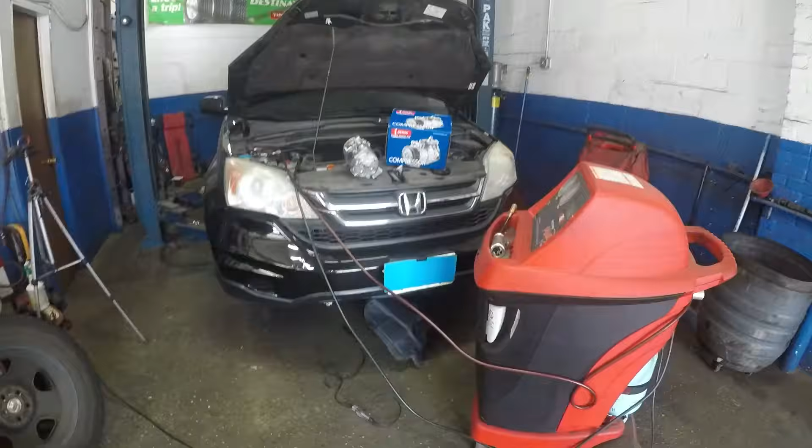Today I got this AC machine hooked up to this 2009 Honda CRV, and what I'm doing here is sucking all the Freon back into the machine. Pretty much it's called recovering.

Whatever Freon is in the system is being taken out, because this Honda CRV has a bad AC compressor.

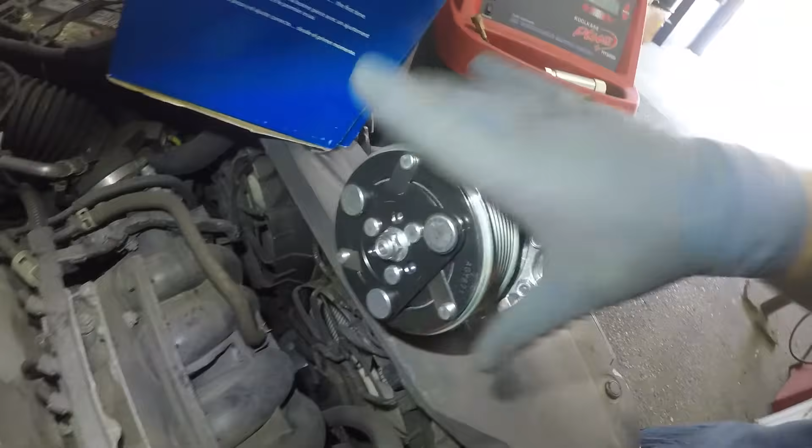This is what the piece looks like. This is called the magnetic clutch here. So when it gets power, this engages, so both of these spin the belt and this spins together.

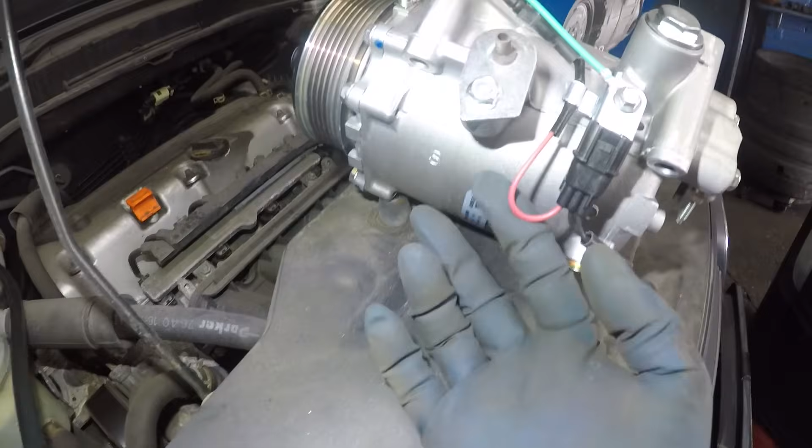So see this red cable down there? You could check the power with a test light. I do have a video right down here.

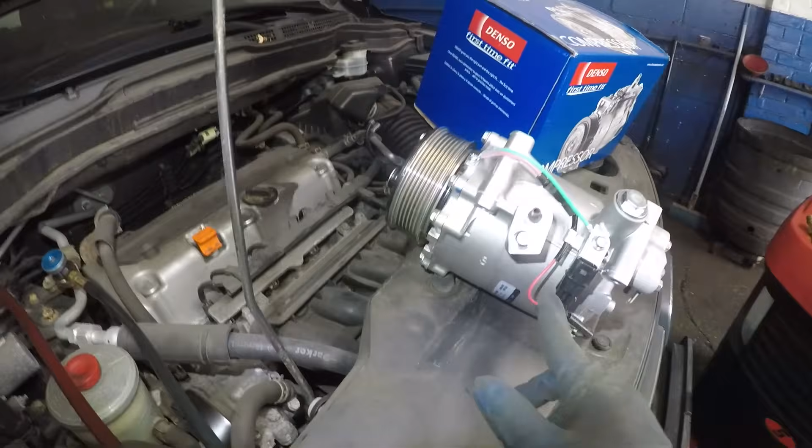That's where the AC compressor is. If this has power and your AC compressor doesn't engage, it's a bad unit, it's a bad clutch inside. Try not to replace just the clutch, because it's going to be probably more expensive that way. This thing is about 300, almost 400.

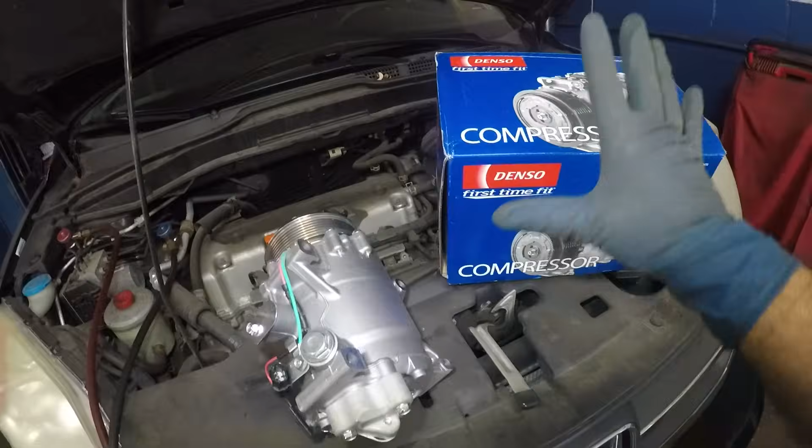That's it, $400 even. This is what I'm using, Denso, and there's a part number. All right, let's throw the box away now. It doesn't have a core, it's a brand new piece.

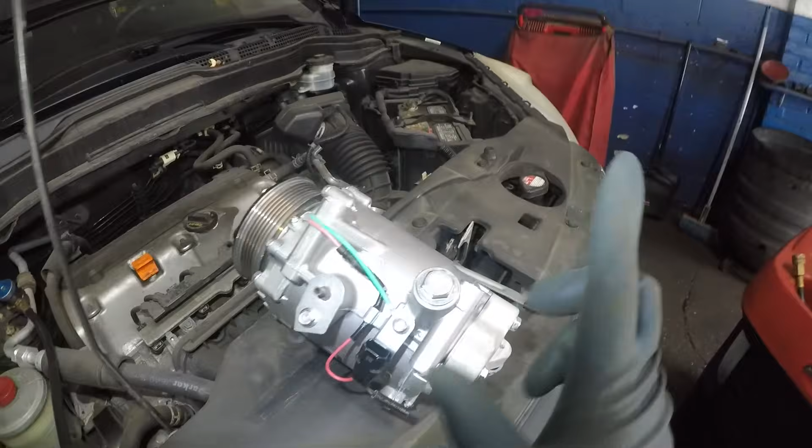So there's a line that connects up here, and there's a line that connects over here. They're both 10 millimeters, I'm gonna remove them both. This thing has oil inside, we don't need to add any oil, just make sure with your parts department. But I'd like to recover even the oil later on and put in fresh oil.

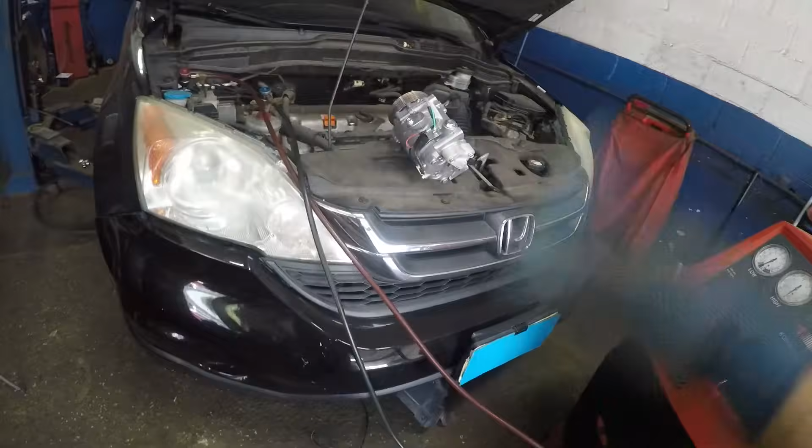Anyways, we're gonna get this job going by removing the belt, and we're gonna push this reservoir out of the way. We'll get the belt off first, and from the bottom we're gonna take out the 2 bolts for the line, 10 here, 10 there, and replace the new compressor. We're gonna let this thing recover, and then once it's done, we'll vacuum and add the correct amount of Freon into the system.

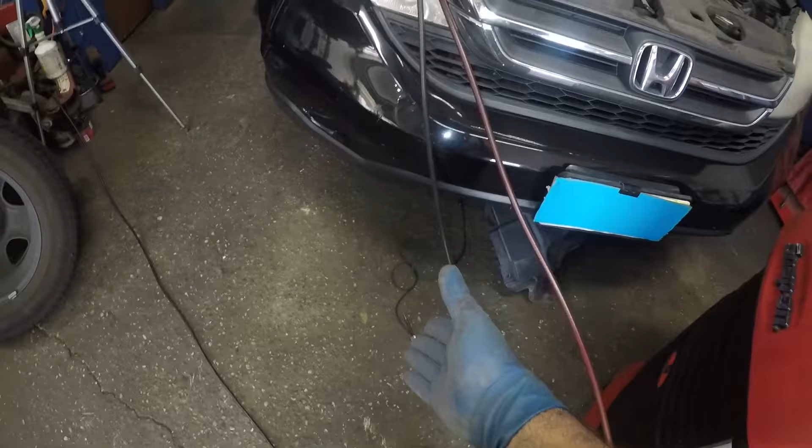Anyways, stay tuned, check out the video on how to check the relay fuse on this bad boy. Use a test light before you make any determinations. Change the relay anyway, I did that on this car. It's gonna get it, it's gonna stay there. You never know when that relay is gonna fail, so check that out.

All right, so far I popped this clip right there because it was holding onto the pipe on this reservoir. I'll push this tab and the reservoir bottle comes up, push it to the side, and I can see the tensioner. All right, so let's take out number 10.

What I'm gonna do is take off the 2 bolts right there, 1, 2, so this bracket's out of the way, so I don't want to see that bracket.

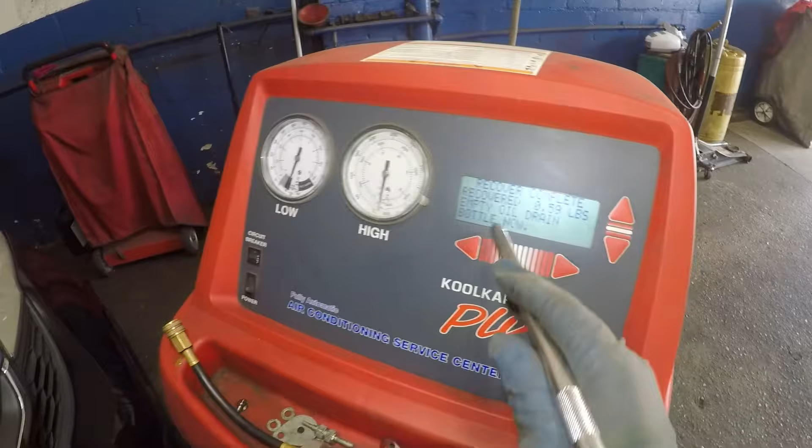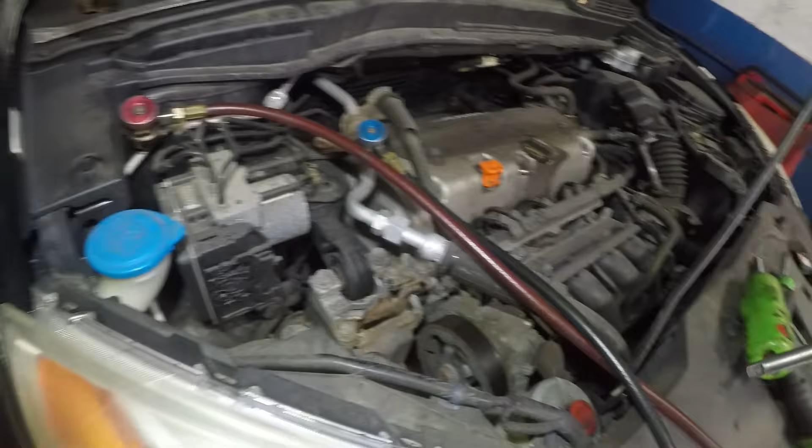So the machine has recovered Freon and oil. It didn't have a lot of Freon, but the system still kicked in, and it has power, so the compressor should have been on. Even if it didn't blow cold, it should have been on.

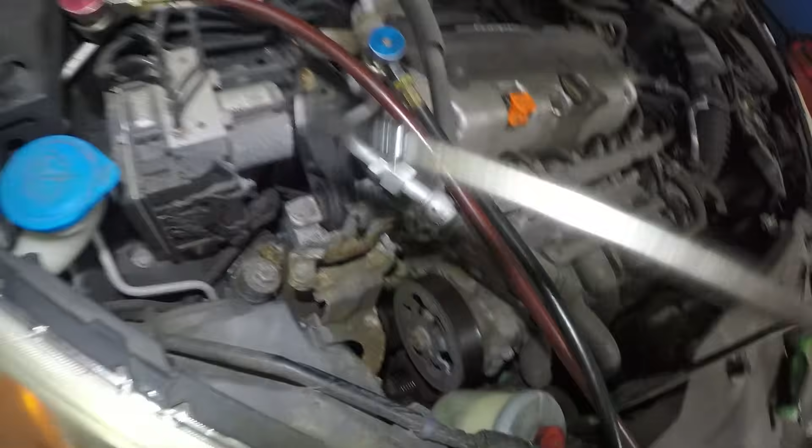But anyways, let's take this, let's put this on, take out a little electric drill. I'm gonna put this back last, that'll be the last thing I put on this little guy.

All right, now we have a lot of access, and we can even push this bottle more down if you like, but I don't want this to block my belt, so we'll probably bring it to this side. So we need to get a 14 and pull on that belt. A lot of people can reach it from the bottom, it's all up to you.

At one time I had to remove this mount because I could not get it, but anyways, I'm gonna do without it today. So this is the part that you're only gonna see a little bit, because I do need to put my camera away.

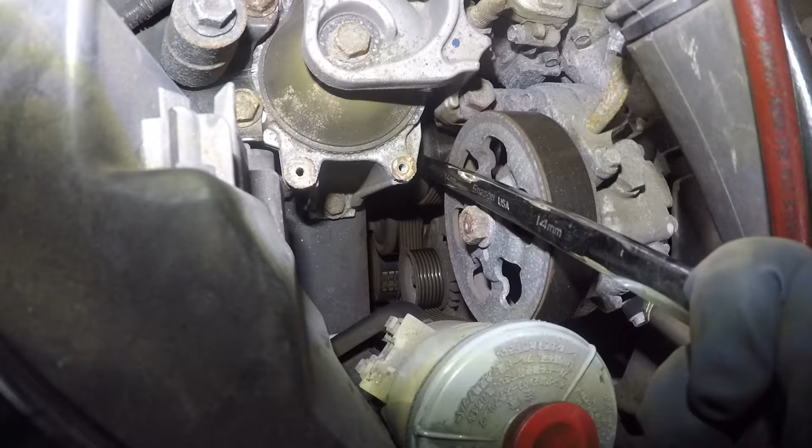So I got this, let me just show you what I'm doing over here. Get out of here, reservoir. So all I'm doing is yanking this little guy, and you see the tensioner, it just goes out of the way and the belt is loose, but I need my other hand to slip the belt off. So just do that, and if you like, push the reservoir to this side.

Okay, so I got the belt off, and now I can go down below. I'll leave it like that. My ratchet here is stuck, it's all right. The reservoir can sit here. Do not start the engine with this thing here, you'll rip apart, you'll rip a hole in that thing.

But anyways, we're gonna go down. So the belt is off, machine's out of the way. We're gonna go up.

So the vehicle is up in the air. What we're gonna do next is, if we come down here, you could take off the belt if you like right now, or just let it hang there and bypass the compressor.

Right from down here, we're gonna take off the 12 there, and then there's another 10 here, and another 10 connected to that line. At the same time, we can disconnect the connector by pushing on the tab here. Take off the connector, let it sit to the side, and make sure nothing else is connected to the line.

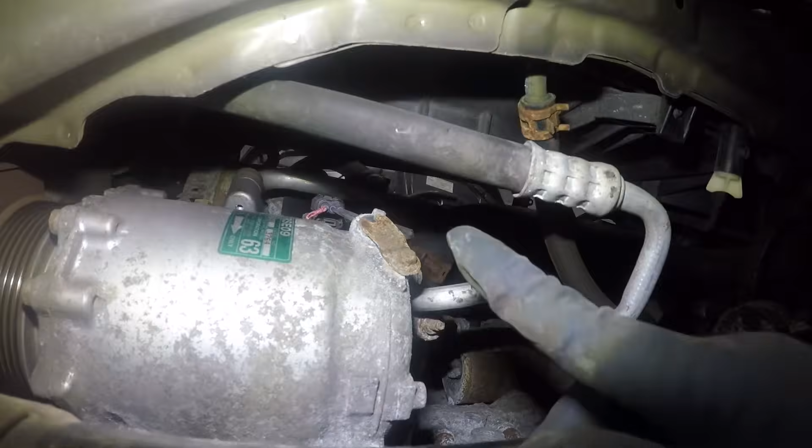So this is pretty much very easy. What I'm gonna do is take off this screw and take off the other one off the line right there. I can reach it from right here with the ratchet. Let me get my tools, and then we're gonna remove 1, 2, 3, and then 4 bolts up here.

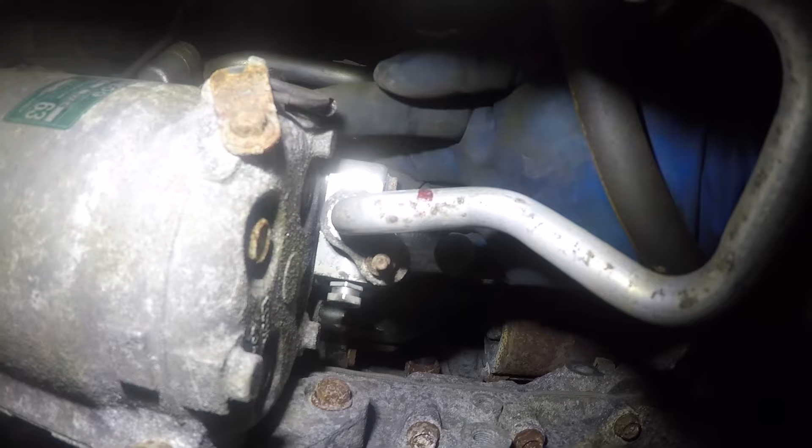They're all 12 millimeters, all of them. This is a 12 up here, you can't see, but let me give you a better view. Right there's a 12 - the lighting's just crappy to get over there. You got a 12 right there, sitting on top of it, right in the center. And then you got a 12 here and a 12 right there.

And the compressor should just fall right here. Just be careful with your face. Okay, so here goes nothing.

Sometimes these lines, the bolts on the lines will break, but as they come out, very good. And there it goes, the number 10 right there. And this line should easily - vacuum pressure is cool, it's all good.

So we just took off the vacuum line, and then I'm gonna do the same thing for the one up there. Okay, here goes the second one, right from over here.

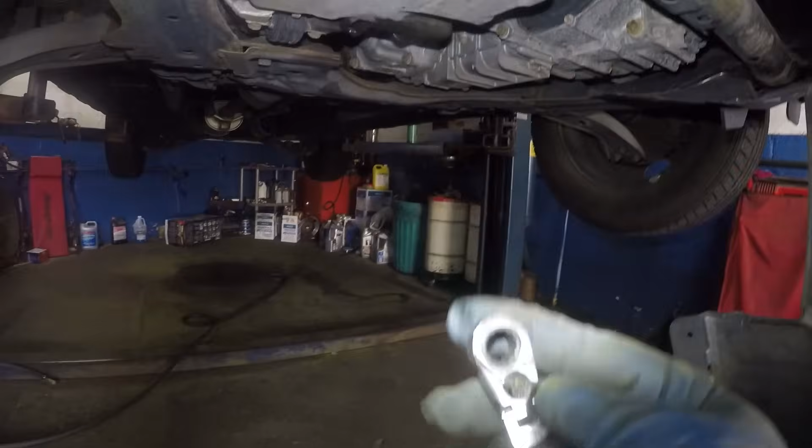Okay, the little guy doesn't want to fit on it. I might have to get a deeper socket or a wrench. Okay, so here goes try number 2 with the ratchet gear wrench. That's what I meant. Okay, got that going the wrong way, and that's not gonna fit there either. I'm sure that's not gonna fit there.

All right, I am gonna have to work some magic here. We'll be right back, and I'll show you the tool that I use. I cannot get that number 10 on the line, so my plan is to bring the compressor down a little bit because everything is just blocking my wrench or ratchet from turning.

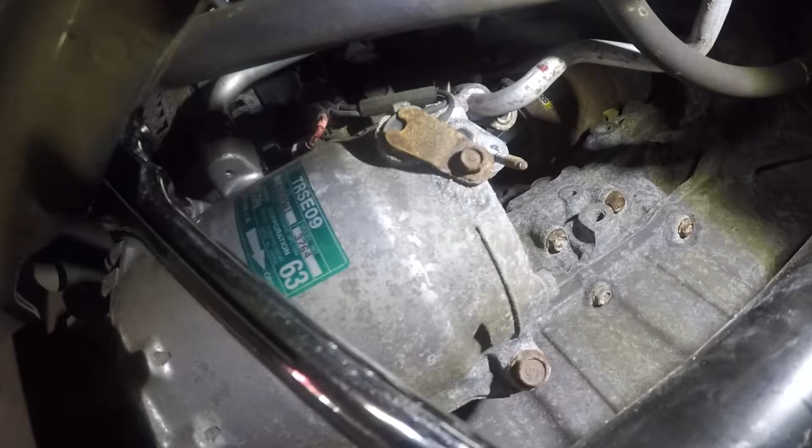So I'm gonna take off the 12 here and the 12 there on this compressor next. So I'll take the 2 number 12s, and then you'll see me take off the bottom 2. Okay, so I got this 12 deep socket hooked up. I'm loosening the one on this end, and this is the second one I'm loosening right now.

Once it's loose, you might be able to remove them by hand, just like so. And if they come out, very good. Try not to take off the bottom 2 because that's gonna hold it down for you. They're very easy, but these are long bolts, and this one comes off. Let me see - okay, this one's still tight, so I'm gonna have to keep it going with the ratchet and the socket here. Just keep it going.

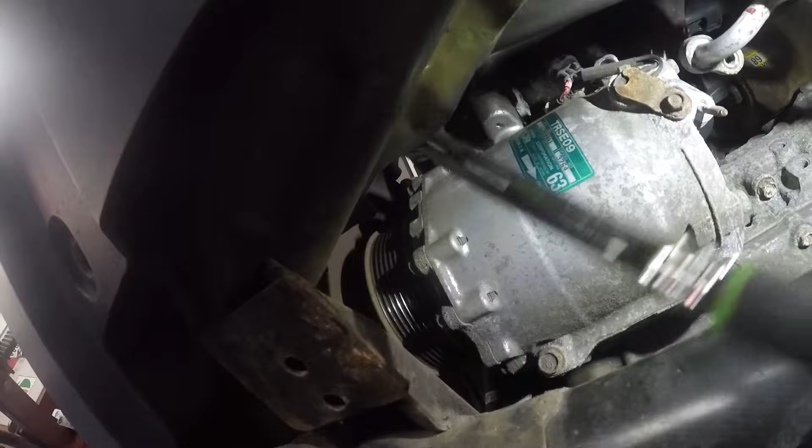Please be loose. Okay, so let me get that off. Once that is off, we'll do the bottom 2. Okay, got both of the bolts out from the top.

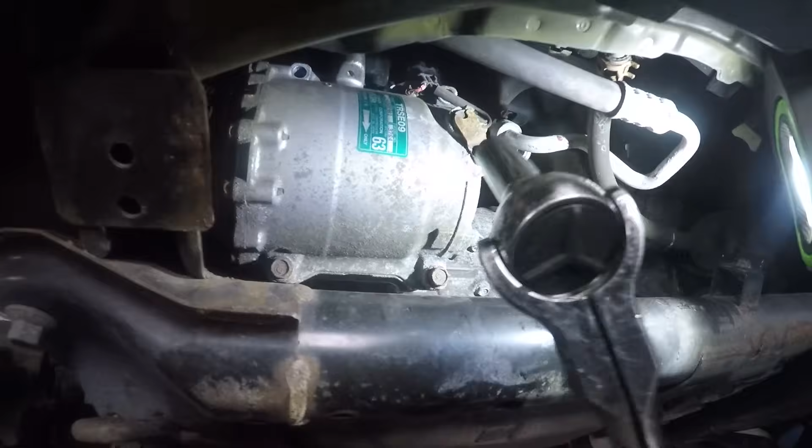Let me smack this one. I might have to get a smaller socket extension. Okay, got like an inch long extension there. Okay, so this is loose. I'm gonna drill the rest of it out.

So let me break this one loose also, and then we'll use our electric drill for the rest. Here goes nothing, boys and girls. So there you go. I like to keep them in order.

You see, this is shorter, so I'll keep these 2 on the top, this one right exactly where they're at, and the compressor is all loose. So these 2 are the same size, and those 2 are the same size, and the compressor is probably hooked on and hanging there. So what we do is we just take off, and now we'll have better access.

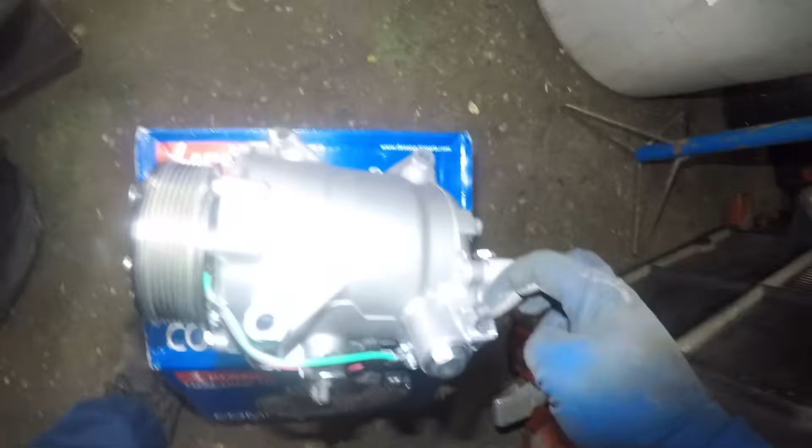So pretty much this compressor is sitting here. You see these little notches here? It's sitting on those notches. And this is the notch I'm talking about right here. And it's just sitting there.

Lift it up and bring it down. Lift it up and pull it off. Let me get that second line loose, and then the AC compressor should just come down right through here.

Doing this worked out really good for me. Look at this, I got the bolt loose already. This thing is a piece of cake. Pop the line off and the AC compressor comes right off. So there we have it, our AC compressor is nice and loose.

What we're gonna have to do is work some magic here now and get this guy out of here. I might not be able to catch it on camera, but this is where it's gonna come down from, right here. Just be careful with the transmission line that goes to the radiator, and once it's out I'll show you guys exactly what I did here.

Pretty much I pushed the line up and twisted the compressor. It still has oil in it. Whoa, whoa, whoa, I thought the machine would suck that out. Oh my God.

Snap on. I'm not even gonna say nothing. I'm just gonna leave it there.

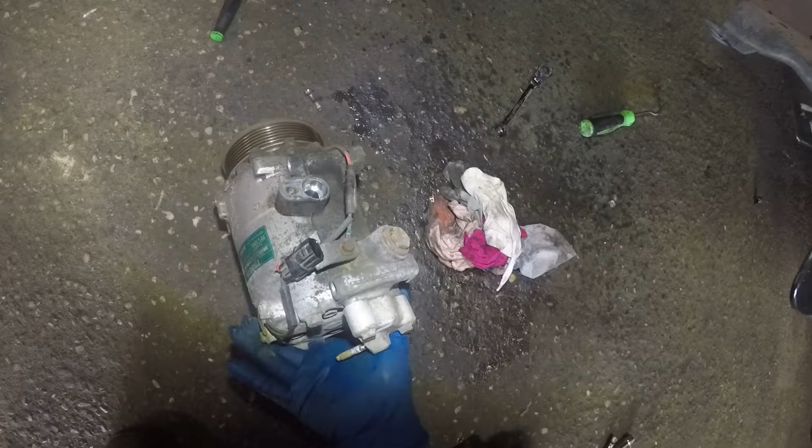There's your AC compressor, it's a done deal. All right, so I'm gonna put this away.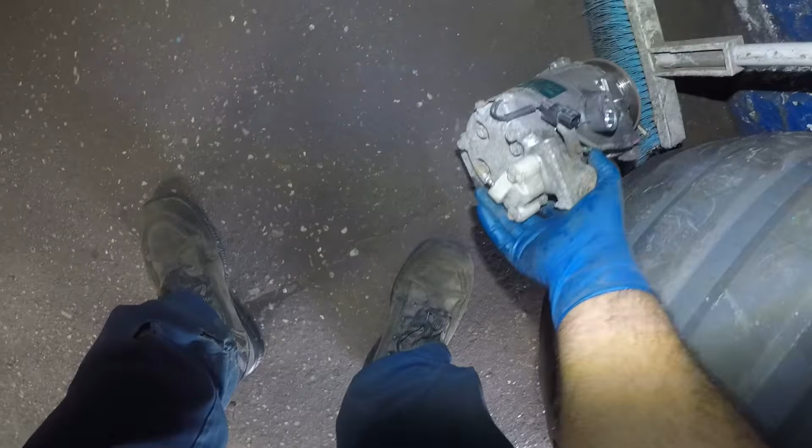Just put this guy right here, leave it right there, make sure it doesn't leak. Make sure you buff this area. The compressor needs a good ground. This looks good, no problem. Just make sure you buff the areas down.

I'm gonna take a small break. I'm gonna come back and throw in the AC compressor.

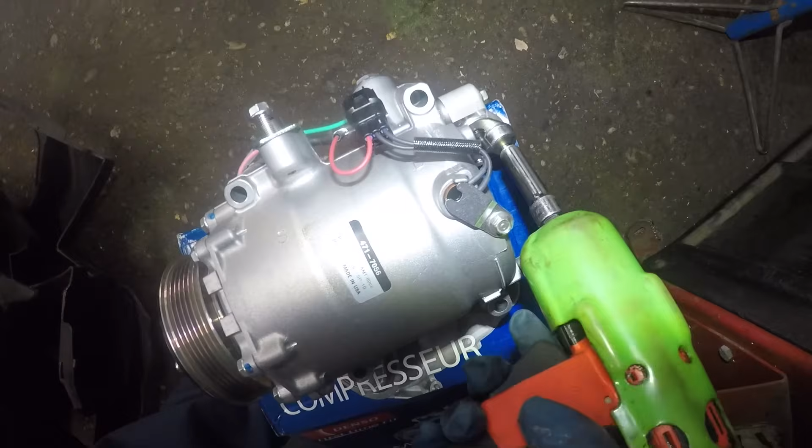Okay, so here's our AC compressor. Let's take off this bolt and this nut here. It comes off. This one, I'm sure it has oil in it. Let's pop this guy open.

What I like to do is, if you want, you can leave this rubber boot in there so you don't make a mess. Remember how we pulled it off? Let's push this back in because it'll be easy to take off. We could reuse these or the older ones, or use these new ones.

Let's make sure this harness here is connected. I had a problem one time, this wasn't connected and nothing worked. Okay, let's grab this guy. It's heavy.

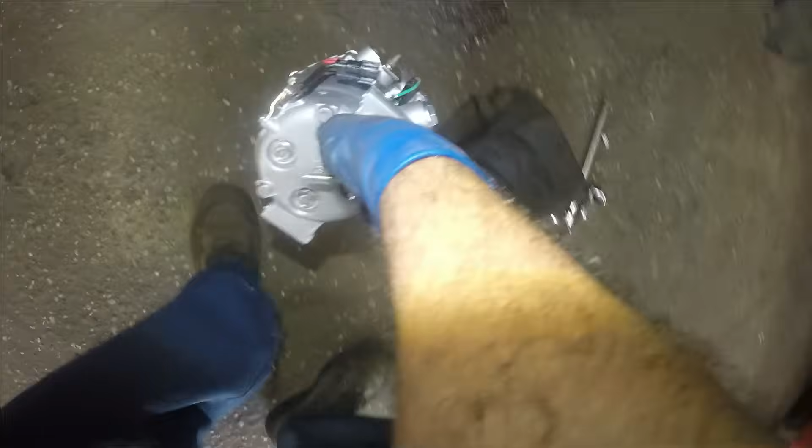Slowly. What I'm gonna do is stick this back in there, and then we'll continue from there. I don't want to drop it while I have the camera in my hand. So our AC compressor did not come with new O-rings, but those look pretty good.

Should be all right. We'll put a little bit of dye, and what we're gonna do is first put this line in. I don't want to pull that off yet. Let me center this so it's facing upward.

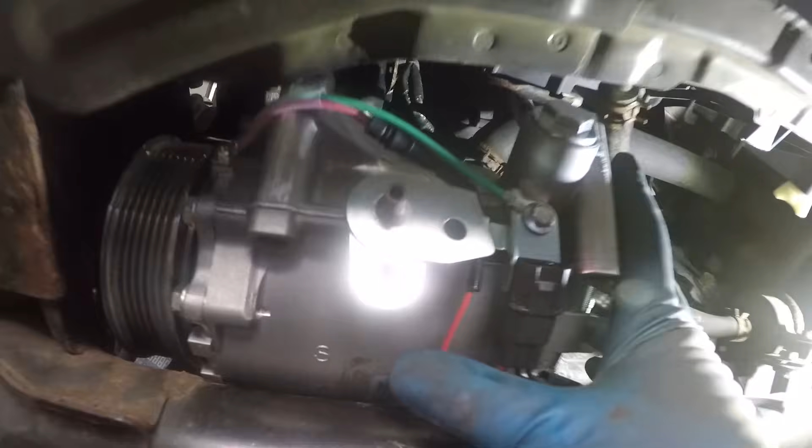Just twist it. I am going to be taking this old bolt because the new one is not lengthy enough, and make sure your line sits flush. After that, you're going to tighten this bolt and everything should be good. Once I have this in, we'll continue.

Let me get this going and then we shall continue. Once this line is nice and tight, while you're here, this connector, just go up above it. We don't want to damage the connector, or maybe the connector stays behind this way. Plug in the connector, but not yet because it's not lengthy enough, you'll break it.

So let's lift this guy up. We're gonna let it sit right where it belongs. Right there, you see that? It's gonna sit itself right where it belongs.

And then what we're gonna do is let's take the shorter bolts. Okay, it's not perfectly straight, I think I got it crooked. There you go, that's much better.

Let's take one of the bolts, put it in there, catch the threads. The key here is catch all the threads, wiggle the compressor around if you need to. Once you have everything lined up and all the bolts have caught threads, then you can tighten it.

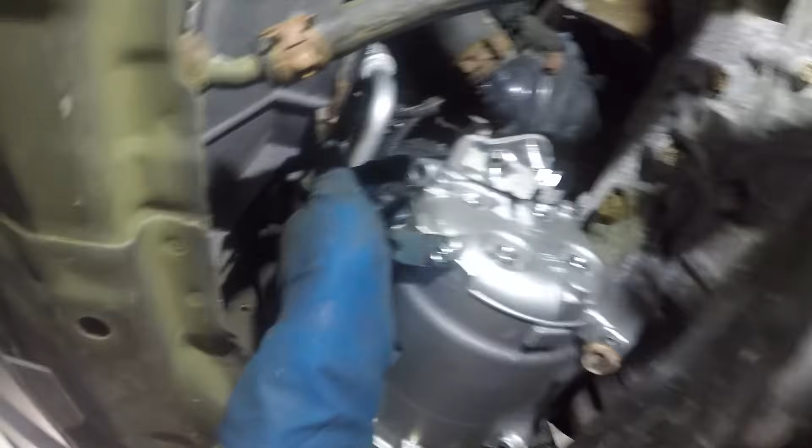But what we're gonna do now is let's connect this connector. Let's take this line and just leave it here for now. We don't want to put this line in because we might have to move it around for the bolts. So let me get all the bolts in.

Pretty much I got these two bolts in. I'm gonna get them in there, but I am not gonna lock them down because we still need to put the top two in. Just snug them enough where the compressor can move around, but at the same time it will hold the compressor up. If you need to, just go back one thread.

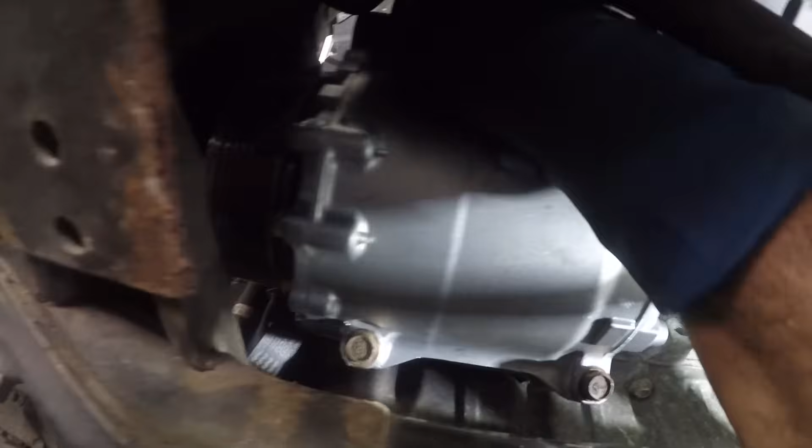And there we have it. Now what I'm gonna do is take these 2 bolts. One goes over here, and the second one goes on the other side. Bada bing, bada boom, I'm gonna tighten all 4 bolts. Make sure you tighten them nice and tight, hand tight, torque if you need to. Make sure your connector's in, and everything looks good.

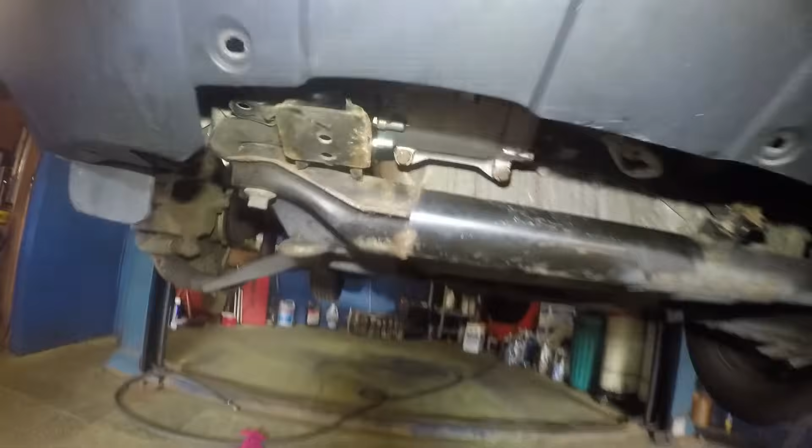Okay, everything is done. These bolts you can torque using a torque wrench. I torqued this one, that one, and the 2 on top, but I did need to work with an extension and this extension here. I'll give you the torque spec, but this vehicle is the same from 2003 and up, same setup, and I'll check a few for you guys. These 2 little bolts for the lines, I did not torque them, just hand tight. This one I ripped with the gun, a little drill gun, light, and spin good.

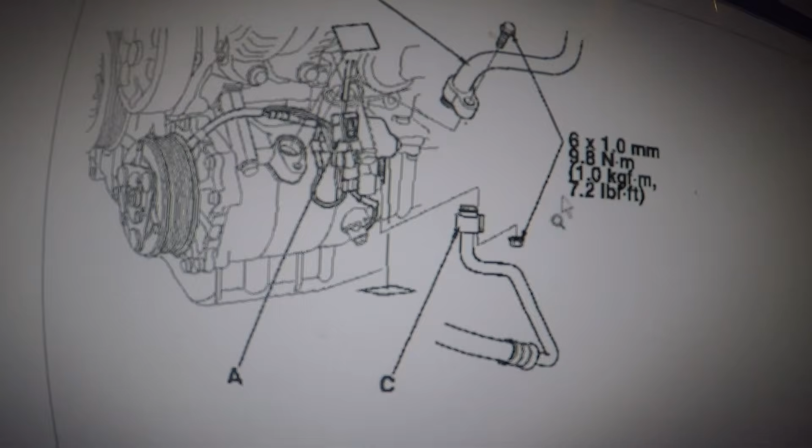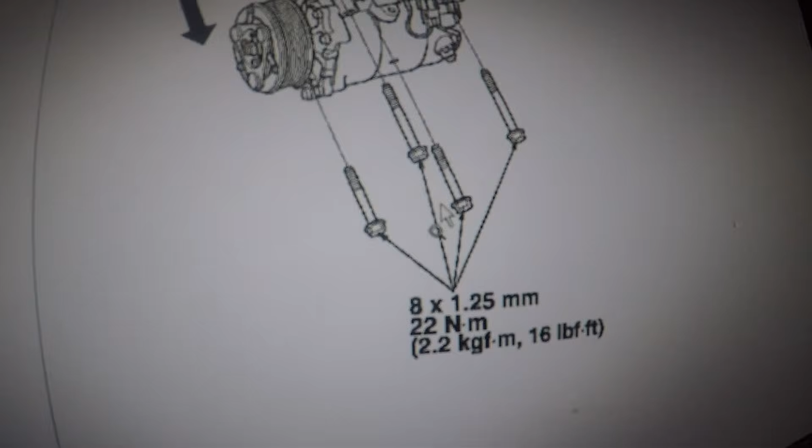Anyways, okay, so we got torque specs for the 2009 CRV. This bolt right here for the AC line, this is the top one, 7.2 foot-pounds. And then you got 4 compressor bolts, they're 16 foot-pounds. Okay, the bolt, the nut, and the bolt, this is for both of them. That's how simple it is. This is for '09, as you can see right there, '09 CRV.

So here's a picture for the '03 CRV, 7.2 for the 2 bolts, just a little bit different setup. And then you got 16 foot-pounds for the 4 bolts. Bada bing, bada boom. So there's pretty much not a difference in torque specs, the job is about the same and everything. But anyways, if you're gonna do it, you might as well knock it out and torque everything properly.

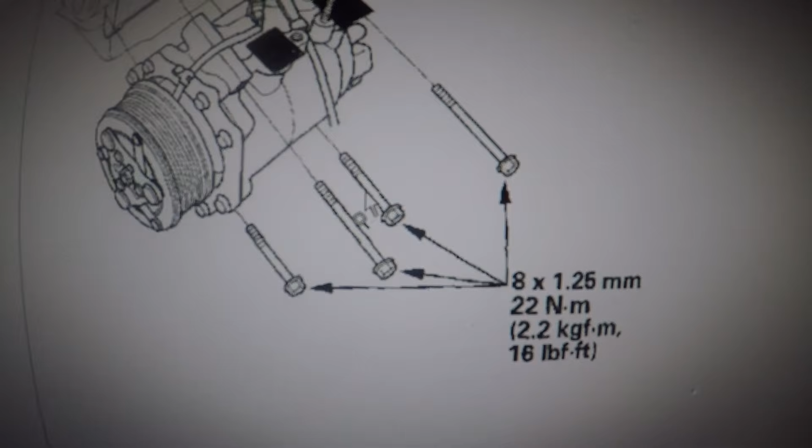Yeah baby, AC compressor is locked in. Only thing we got left is make sure you put a little bit of oil on the ring, or you can put it in here, and then stick this line in, and make sure your seal goes in flush.

And put on the number 10. We're dropping it, getting too excited because it's almost done. The hard part is the belt, boys and girls. Make sure your line sits properly, and then smack it.

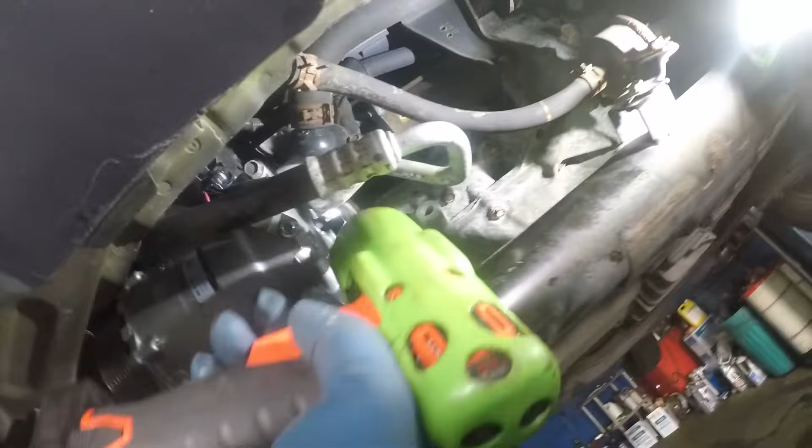Bada bing, bada boom. Pay attention to the leak on these 2 lines. Other than that, you're probably not gonna see me do this part, the belt part, but right from down here you can put on the belt on the AC compressor.

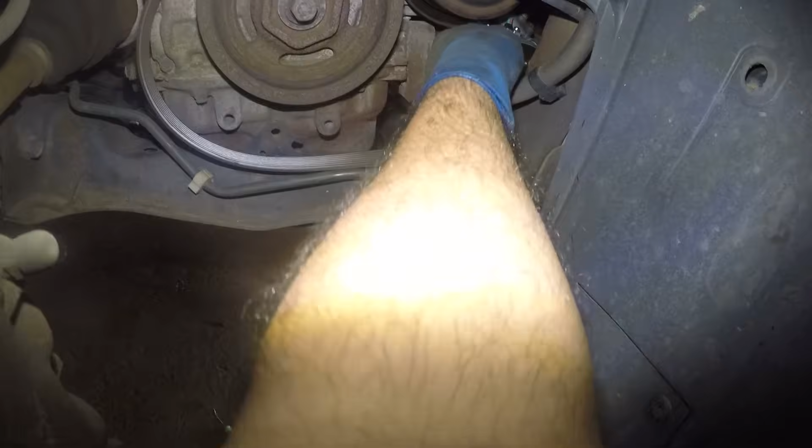It's gonna have to stick right through the gap here. So let me get the belt on, then we'll recharge the whole system. Woo, got the belt on guys, it wasn't as hard as I thought.

So what I'm gonna do is put the rest of the stuff back, this little bracket here, the line, but meanwhile I'm gonna connect my AC machine. We're gonna vacuum for 20 minutes.

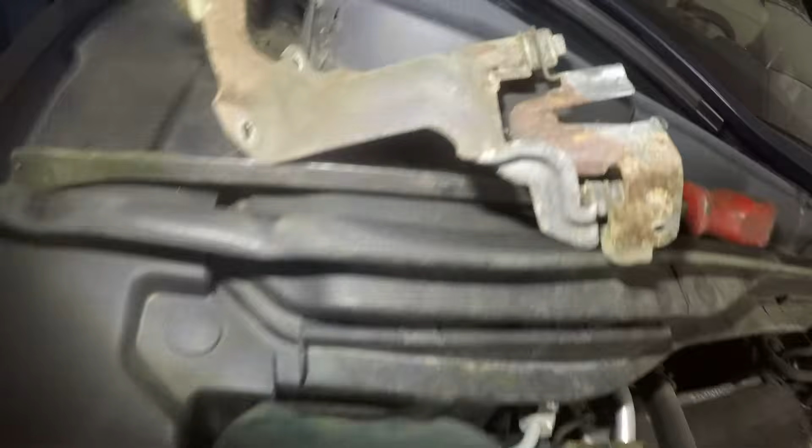So got my machine here now, and what we're gonna do is, this is the low side, we're gonna put this on the low side. Go easy, you don't wanna break the lines. Let's open up that line. The high pressure line is over here on this side, and the caps, I have them up there somewhere. Anyway, this goes on, and I don't know if I got this line in there fully, but I think it's in there.

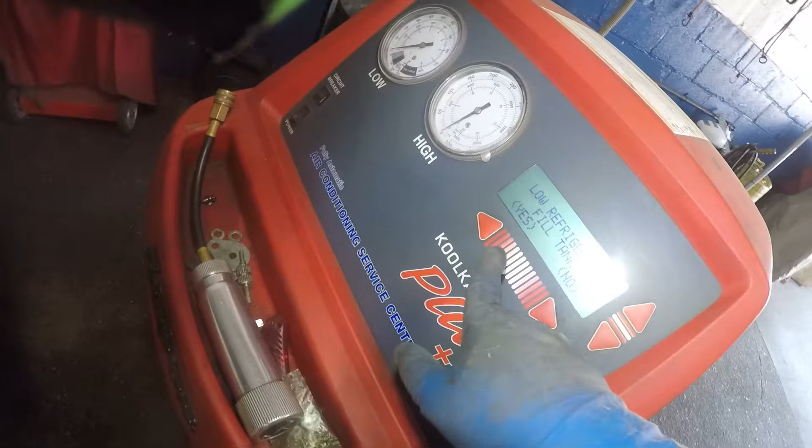Yep, okay, so we're gonna fill the tank. I gotta fill the tank on this guy. Okay, so see the old tank, new tank. Internal tank is low, but that thing was empty as well, so I changed it. Let's fill the tank, start. It's gonna probably put about 9 to 10 pounds of R134 inside the tank.

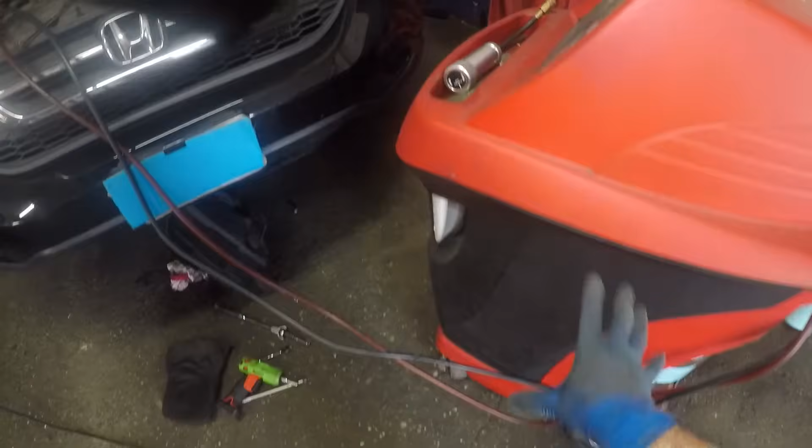Okay, so we're gonna give it a moment, and meanwhile I'll work on this little guy right here. Okay, got them both in there, let's grab our light. Let's smack this bolt in, let's smack the second bolt in.

All right, perfect. This little guy, the power steering line, has to go into that clamp. We're gonna have to bring up this little guy first, get that in, and then lock up the bottom. Okay, got the bottom in, all you're gonna do is lift this up and push this right in. Originally I forced this backward, now I'm gonna force it forward, and you're all done. Make sure nothing is hitting the power steering pulley, the power steering pump pulley, the lines, the pipes here. You're all done, good to go.

Let's pick up all our tools and we wait for the tank to fill up, and then we'll vacuum the system.

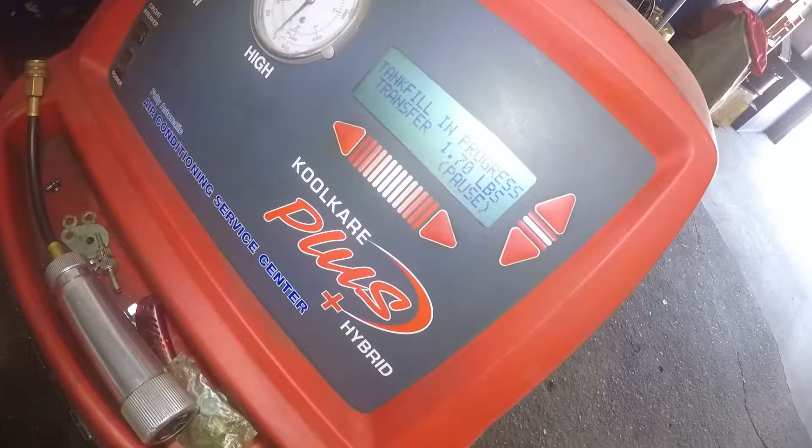So it's working, it's on its way, almost done. And I took in about 5 pounds. It did take in 5 pounds. That's the internal tank, not the car.

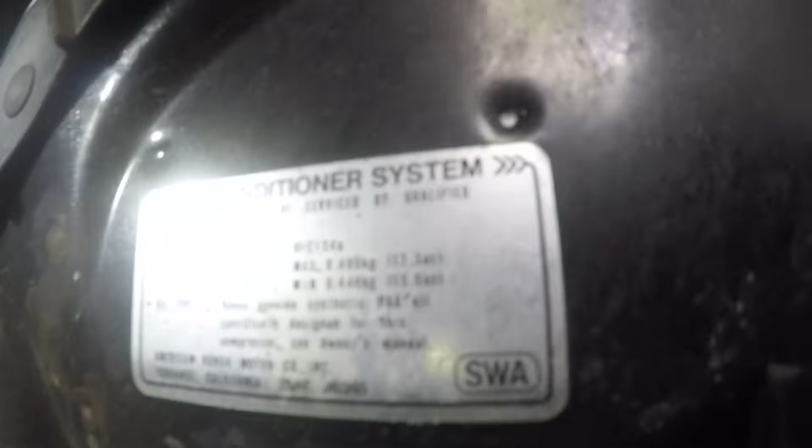Okay, so let's talk a little bit about the car. There's a sticker over here, it will tell you the Freon. It will take 17.3 ounce max, minimum 15.5 ounce, and that oil will be PAG oil, synthetic PAG oil.

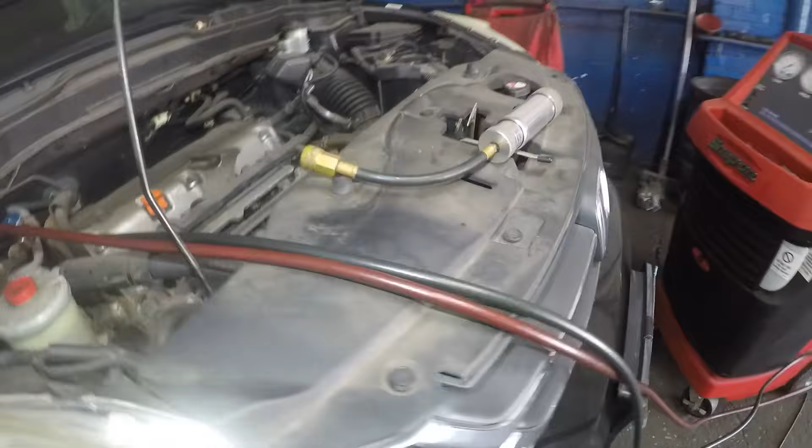Doesn't tell you, but I am using a PAG oil. So I got my oil ready here. Once I do vacuum, I'll throw it into this low line here.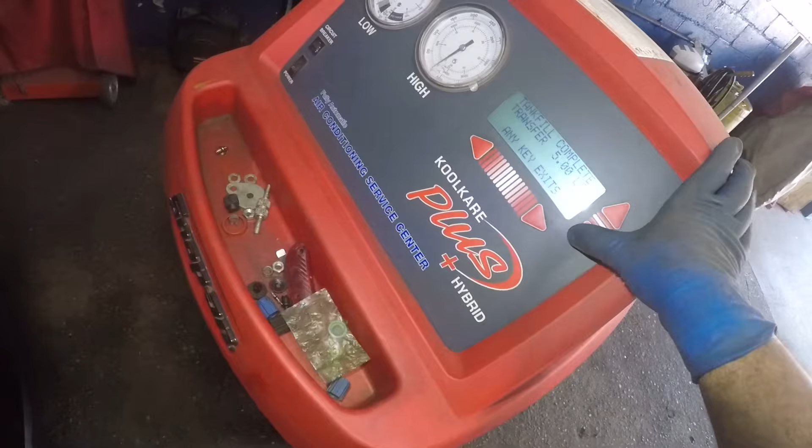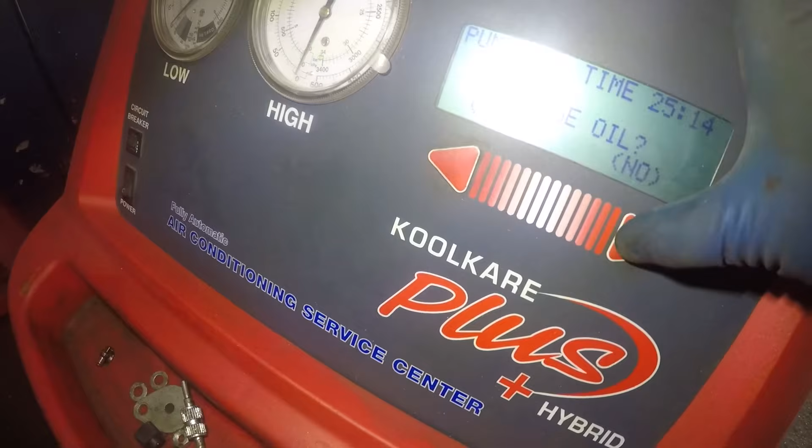Press any key to exit. So what we're gonna do is we already did recover, so we are gonna add oil. Let's just do vacuum, press enter, we still have time. That's the oil the machine is asking about. Let's do 20 minutes, this is a 20-minute wait. Leak test, nope. So 20 minutes of vacuum.

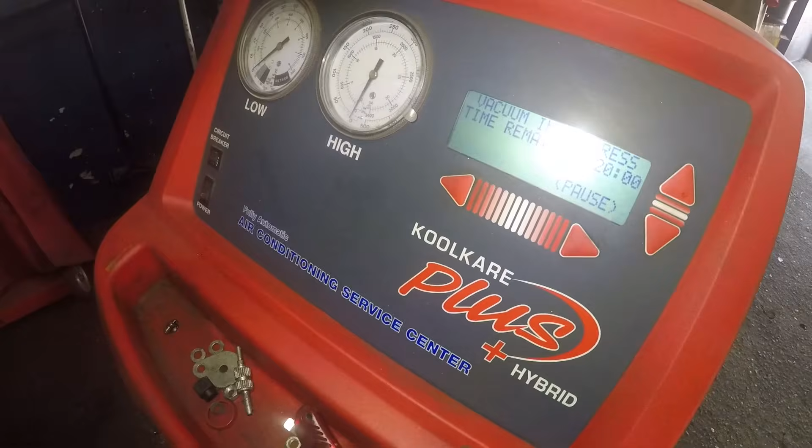So what I'm doing now is I'm sucking all the air, moisture, whatever's in these lines. We don't want anything whatsoever, nothing, nada, zero. And after that, oil goes in and the machine pumps in Freon, and that's it. That's the best way to do it.

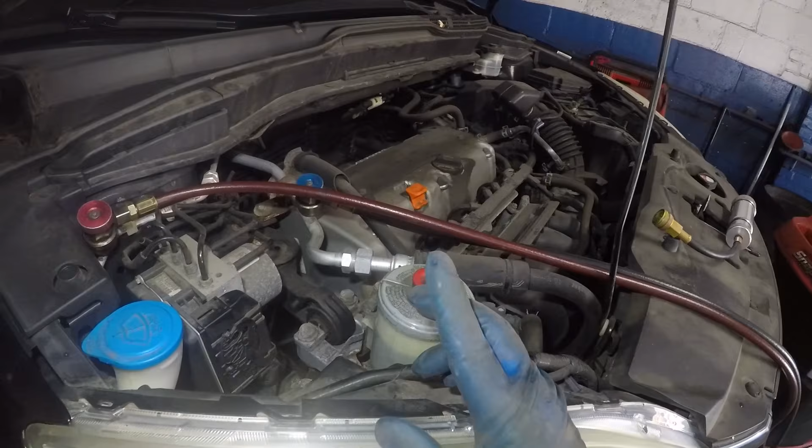Remember I told you the customer did try, if you watch my video about how to, I did do tests on this, the power lead. I did do a test on the compressor, I had power, but the compressor did not engage. Remember, the customer said he did try to put a can in there. It's not gonna work because it has pressure in it. If there's so much pressure in there, more than the can, I would think it will go in -- it would push out instead of going in.

So what we're gonna do next is oil. I wanted a little bit of information about the oil. Too much oil is no good, too little oil is no good. So make sure you measure the oil, know how much you're putting. Even if you don't know how much you're putting, just put it just enough, so you're not killing the system.

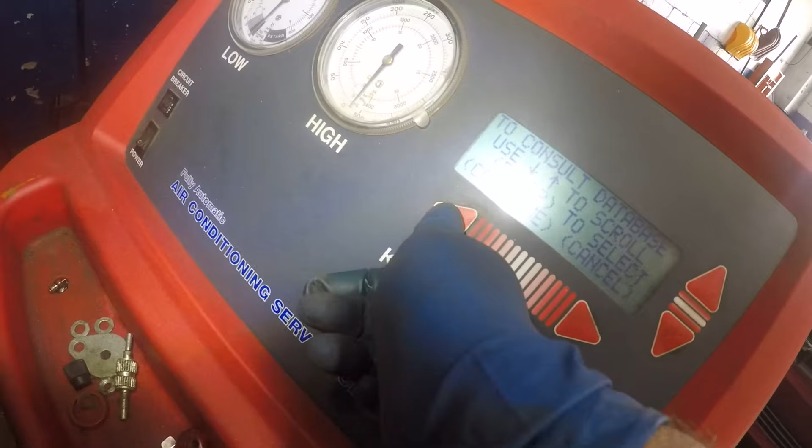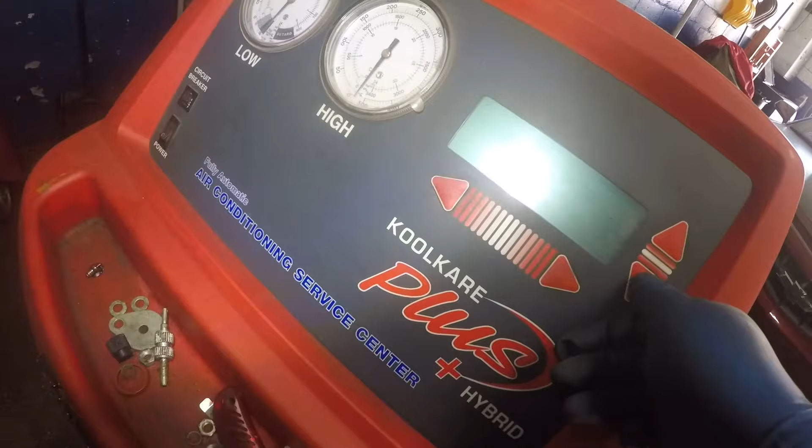So next, let's press any key, and now we're gonna charge the system. So we have to go to charge right there, the arrow, press enter. Nope, it's not an electrical compressor, it's not a hybrid. Let's press continue, we're gonna look for 2009, this is a Honda. Let's look for Honda, and then we're gonna look for a CRV. Press enter, and if it has any more questions, if not, press continue.

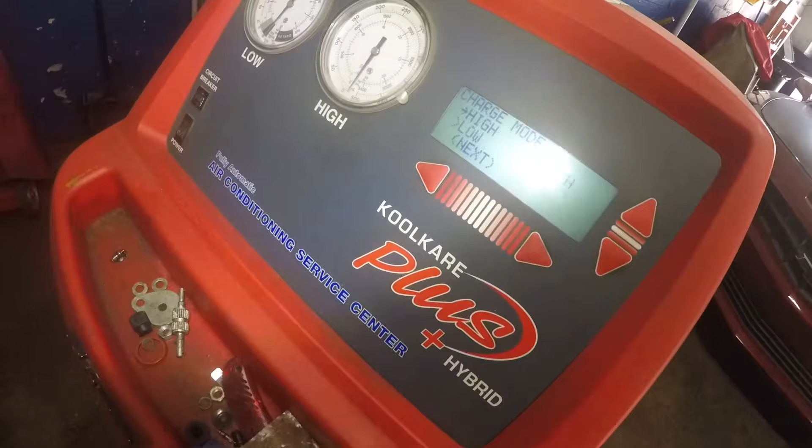You could adjust the pound, so it's 1.2 pounds only, and we're gonna use both lines, okay, high and low. That's what I like to use. Both, start.

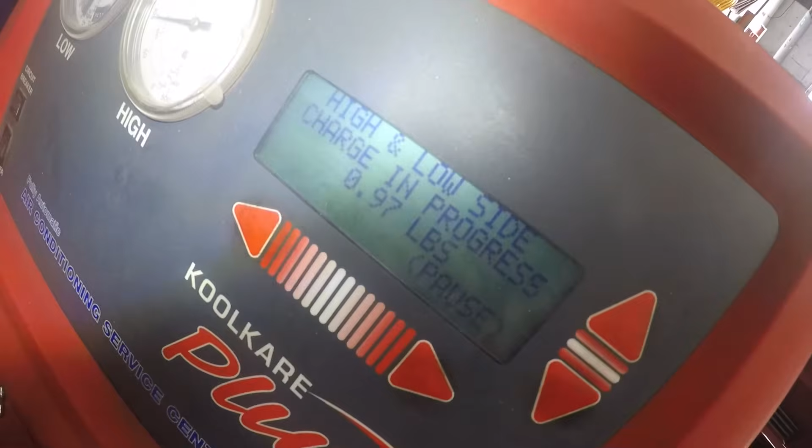So right now it's pumping air into the system, that's what it said there. Listen to this. Ice cold, ice cold, both lines ice cold. 0.97 pound is in there already, and the machine is gonna probably compress a little bit more air to.

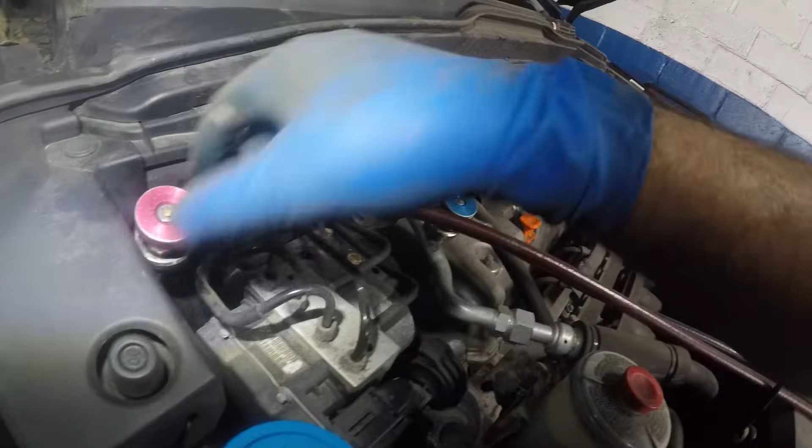That's it, it's charged. So what we're gonna do is open this guy up. Let's pop this open. You saw that sizzling, let's close this valve.

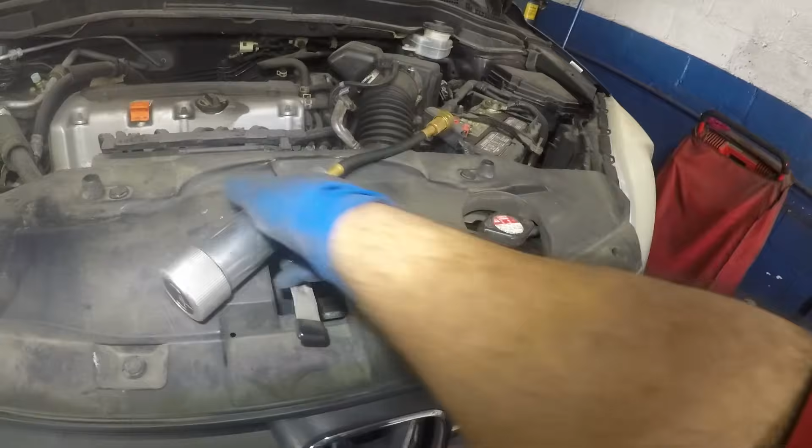So what we're gonna do is go inside the car and make sure this is all out of the way, nothing is gonna hit. And let's put this away. We're gonna start the engine and feel the AC, but let me take off my gloves. So the engine is running, AC is getting cold. Yup, oh yeah, baby.

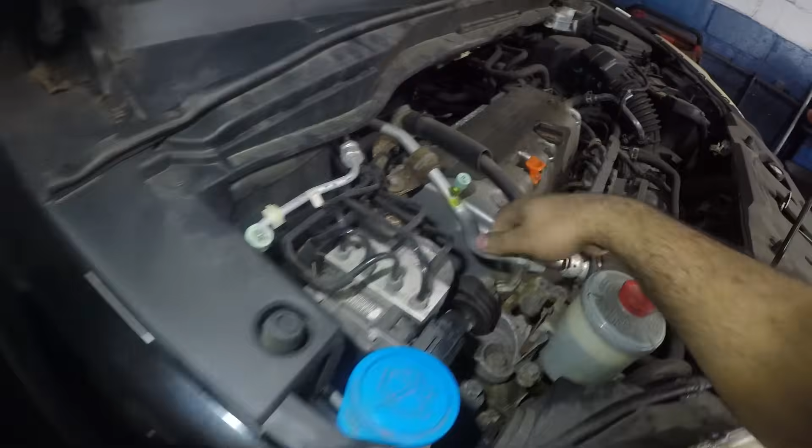If you have a problem that your AC did not turn cold, it could be that you didn't put enough Freon in it. I had a machine do faulty service for me one time. But if you touch this line, cold, whoa. And check this out, look at that.

Working AC compressor. Thank you for watching, guys, and I hope you liked the video. And that's how you're gonna change the AC compressor on a Honda CR-V. Anyways, thank you and bye-bye.